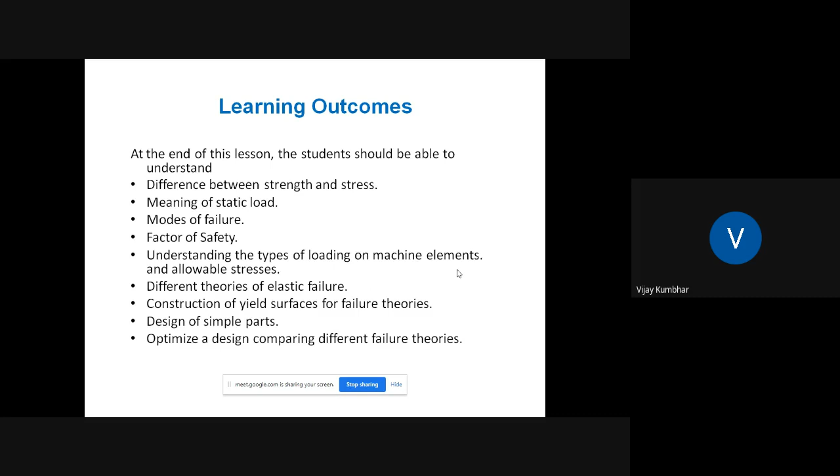There will be specific procedures for general design, component design, and machine design, which you might have learned in earlier classes. So I'm going to brush up on the things. You might be aware about stress and strain. What is strength? Strength is a property of the material or a mechanical element.

The strength of an element depends on the choice and processing of the material. Basically, strength is nothing but the resistance to deformation. Stress is a state of property at a specific point within a body, which is a function of load, geometry, temperature, and manufacturing processes. The book definition of stress is the internal resistive force per unit area.

You might have learned that stress and pressure have the same units, but stress is induced inside the body, whereas pressure is applied on the body. Due to the application of pressure, there will be stress induced. Stress is induced, and pressure can be applied.

As you know, any machine element is intended to do a specific function during its service life. So as per the application, we have to design that particular component, taking into account various parameters associated with it while designing.

In some cases, the stresses acting on an element are very simple and you can calculate them easily, determining whatever stress develops at a particular location of the component by considering the cross-sectional area of that element.

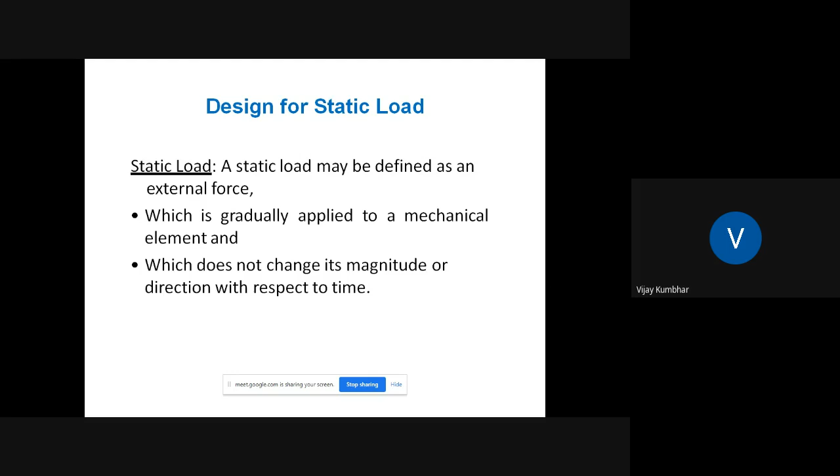Another characteristic of this load is that it is gradually applied to the mechanical element. Whatever load is applied on a component, it will remain as it is, and we can check its magnitude—it will be the same as initially applied.

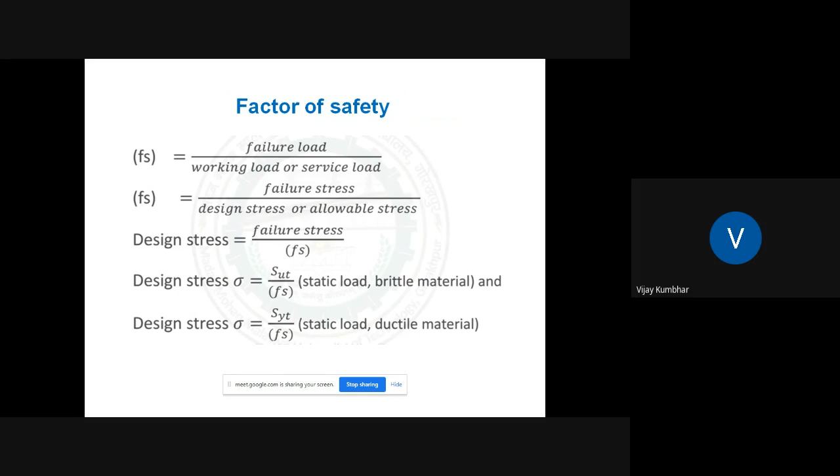Factor of safety depends on various parameters. These parameters are based on the type of load the material is subjected to—point load, UDL, UVL, etc.—on which the chances of failure can be defined, and accordingly the factor of safety can be selected.

After that, the mechanical property of that particular material. After that, the degree of reliability of the material, or the reliability requirement of that material.

After that, calculation of these stresses—because as I told earlier, if a component is subjected to a simple stress, suppose a shaft is subjected to tensile load, then we can easily calculate the exact stress developed at any location of that component. But when the component is subjected to different types of stresses, it is very difficult to calculate the exact stress condition.

Sometimes the component has a very intricate shape, so we are not able to calculate the exact area which is subjected to that particular stress. In that condition, we are unable to calculate the exact stress developed in that component, so we have to provide a higher factor of safety.

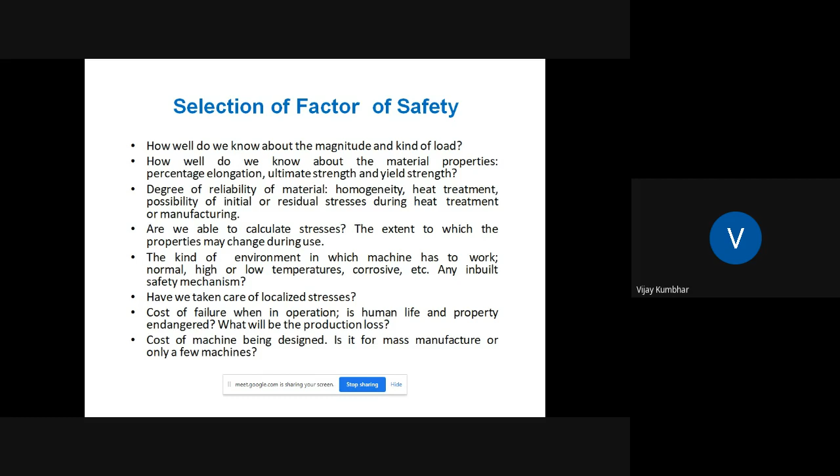So this is the most important part of the selection of factor of safety, and this factor of safety can be selected on the basis of certain guidelines or published literature. You can see these various parameters, and if the parameter is known or unknown, or one parameter is known or unknown, from there we can select that particular factor of safety.

You can see here, for factor of safety for ductile material, in the range of whatever parameters we know, we are going to select that particular factor of safety. In this particular area some parameters are unknown to us, so we are going to select a higher factor of safety for these conditions.

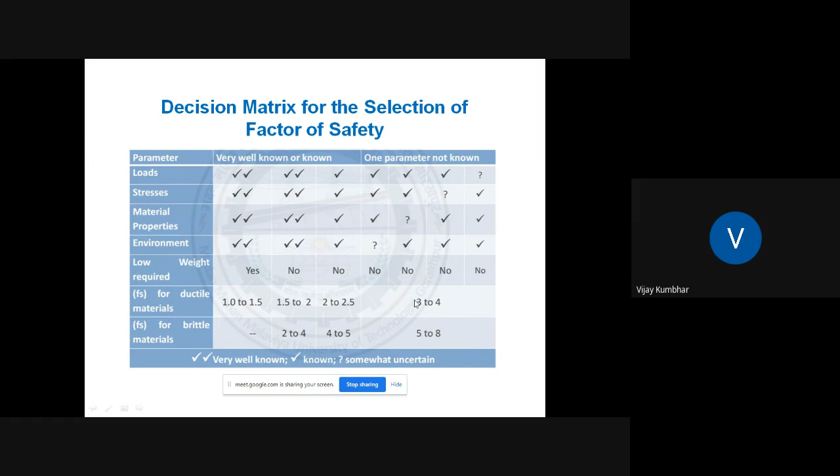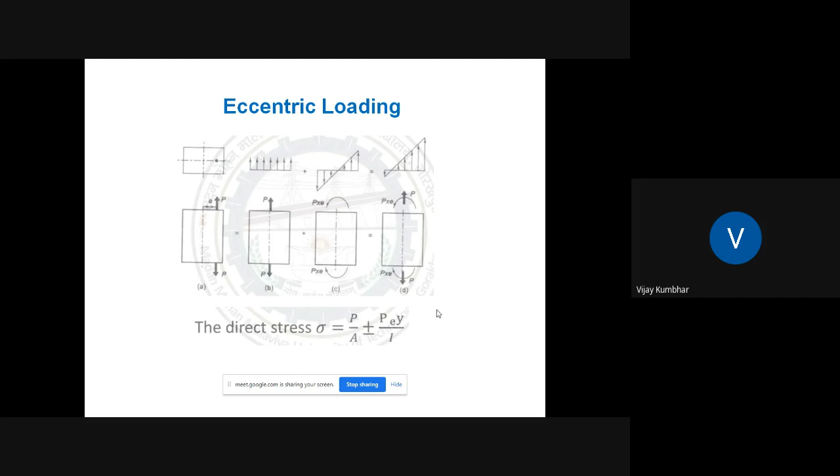Then this is eccentric loading. When a certain member is subjected to eccentric loading, the direct stress can be calculated as P divided by A, plus or minus P times E times Y divided by I.

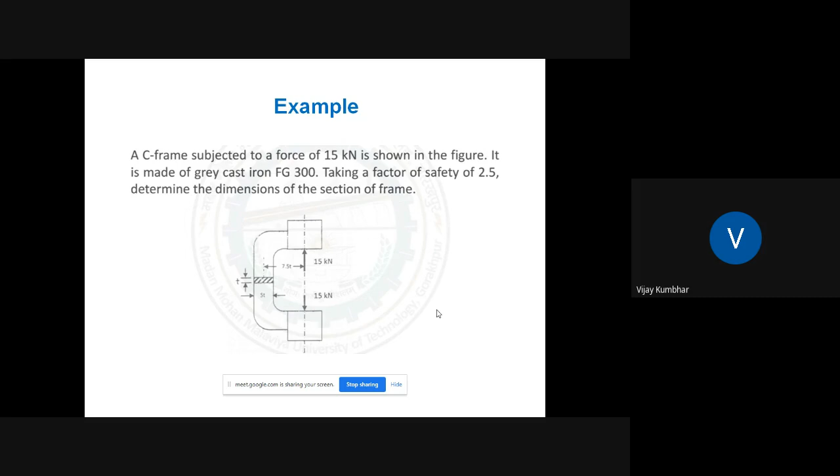So let's see one example of this eccentric loading: a C-frame subjected to a force of 15 kilonewton as shown in the figure, made of grey cast iron FG 300, taking factor of safety as 2.5, determine the dimensions of the section of the frame. So this is the given condition: X equals 3, factor of safety is 2.5, load given is 15 kilonewton, and thickness T.

So first you have to calculate the allowable stress, for this cast iron. We calculate the allowable stress as 300 divided by 2.5, which gives 120 Newton per mm square. So whatever stress is actually calculated must be within the limit, or less than 120. From this we can calculate the direct stress using the formula P divided by A: 15,000 divided by 5T square.

So it will be 3,000 divided by T square. Maximum stress developed due to this moment can be calculated as M divided by Z. So from this equation, by simplification, we get the value for T equal to 15.5 mm.

Such types of simple problems you have to solve during this examination.

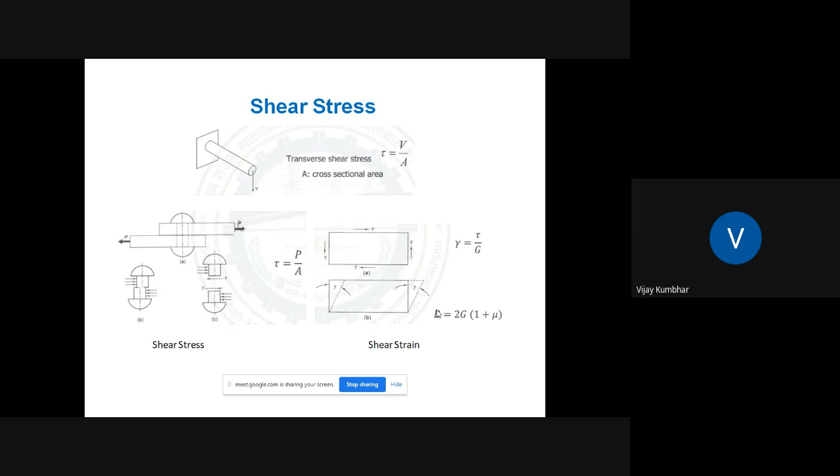So in case of this design, tau is equal to P divided by A. Then sigma B is equal to MBY divided by I, and tau is equal to MTR divided by J. These are the elementary equations of the design.

All the equations related to machine design can be derived from these three equations. So these three equations are called the fundamental equations of the design.

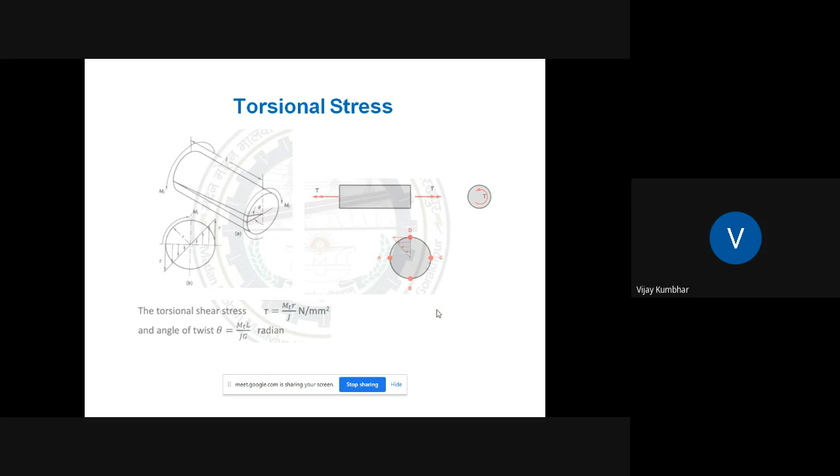That is, one acting in x direction, another in x and y direction, and x, y, z direction. Then you might have calculated various stress conditions. The planes on which the principal stresses act are called the principal planes, and it may be observed that shear stress is zero on this plane.

This is the most important thing - you may be asked about shear stress at the principal plane. It must be zero, you must remember. So shear stress is zero on this particular plane.

So how to draw this Mohr circle diagram? Sigma 1 is equal to sigma x plus sigma y divided by 2, plus or minus the square root of sigma x minus sigma y divided by 2, bracket square, plus tau xy bracket square. This is the biaxial stress condition.

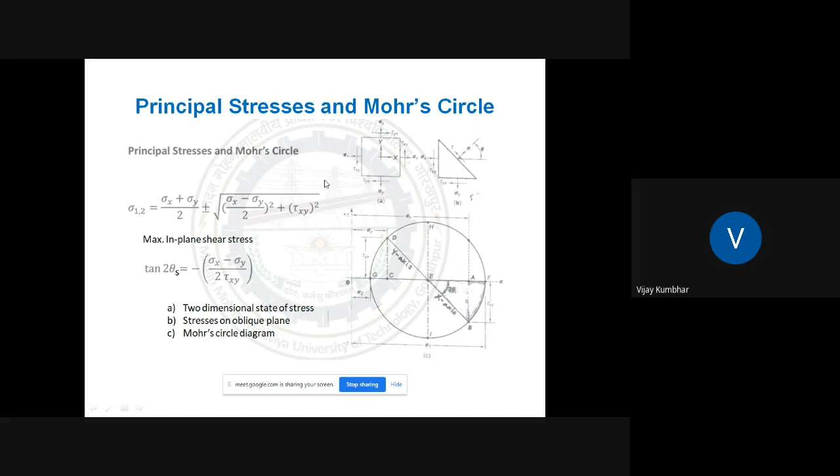So from this Mohr circle diagram, you can easily find out sigma 1 and sigma 2, as well as tau xy.

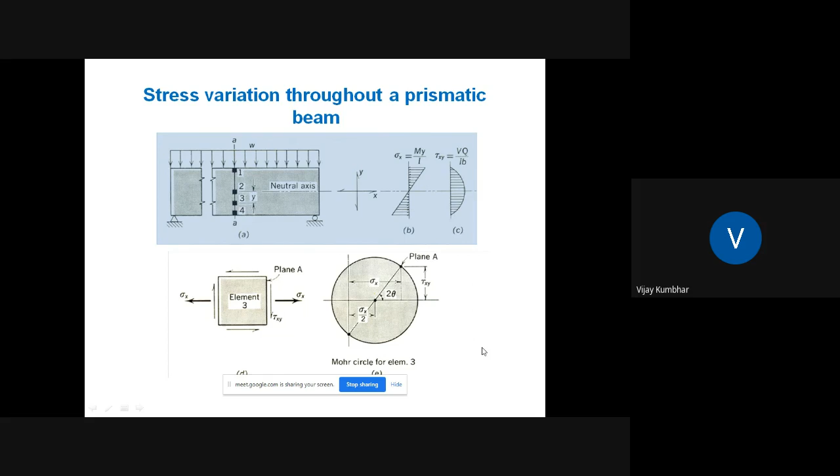So from this equation, from this given condition, you can calculate the Mohr circle as shown in the figure. So we will get the value of tau xy from this particular diagram.

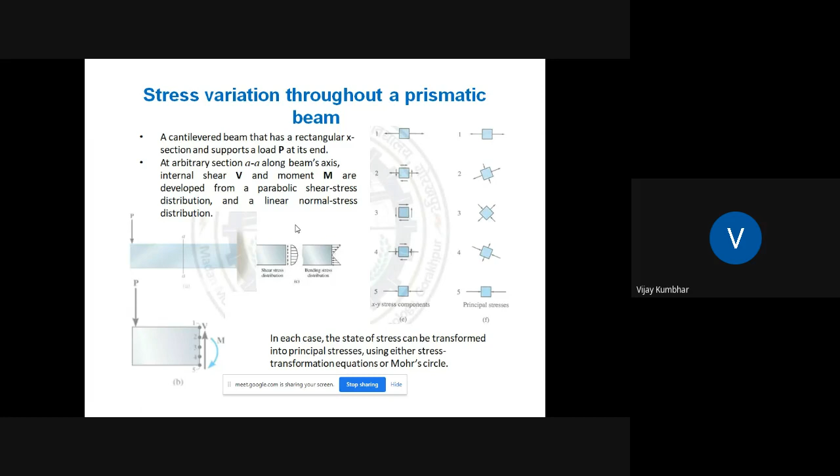This is what the stress variation throughout the prismatic beam, how it may be subjected to distributed stress, how this particular stress is being distributed - shear stress distribution and bending stress distribution might be calculated in case of these bending stresses and shear stresses.

Next is theories of failure. In theories of failure, most machine elements are subjected to several types of force simultaneously. So in order to design such a component, it would be ideal to load a few test pieces to similar forces simultaneously and determine failure forces and design accordingly. But practically, such an approach would be very expensive and time consuming.

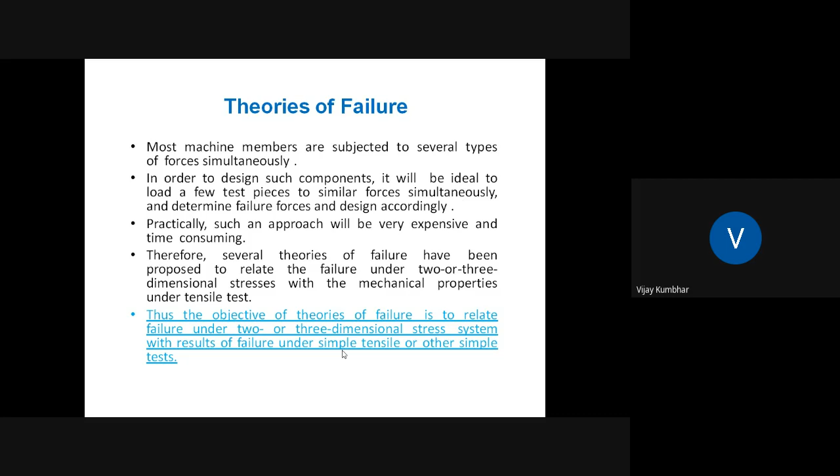Therefore, several theories of failure have been proposed to relate the failure under two or three-dimensional stresses with the mechanical property under tensile test. So we can't predict the failure of any component when it is subjected to several types of forces simultaneously. In that condition, we predict the failure by considering similar conditions using tensile tests.

So there are different types of theories: maximum principal stress theory or normal stress theory, maximum shear stress theory, maximum strain energy theory, maximum principal strain theory, and distortion energy theory.

You might be asked in the GATE exam: maximum principal theory is also known as Rankine theory. The maximum shear stress theory is the Coulomb or Tresca theory. The maximum strain energy theory is Beltrami's theory, maximum principal strain theory is Saint-Venant's theory, and distortion energy theory is Von Mises theory. You must know these alternate names for the theories of failure - it will be very beneficial.

In case of the maximum principal stress theory, according to this theory, failure of any component occurs whenever the largest principal stress in the component exceeds the strength of that material in tensile or compressive stress. Material will fail when the largest principal stress in the component exceeds the strength of the material in tensile or compression.

So sigma 1 is equal to SYT. If yielding is the criteria of failure, then failure will occur whenever sigma 1 is equal to SYT or sigma 3 is equal to SYC. In case of ductile material, SYT is equal to SYC is equal to SY - at this condition the component will fail. But for brittle materials, failure will occur whenever sigma 1 is equal to SUT or sigma 3 is equal to SUC.

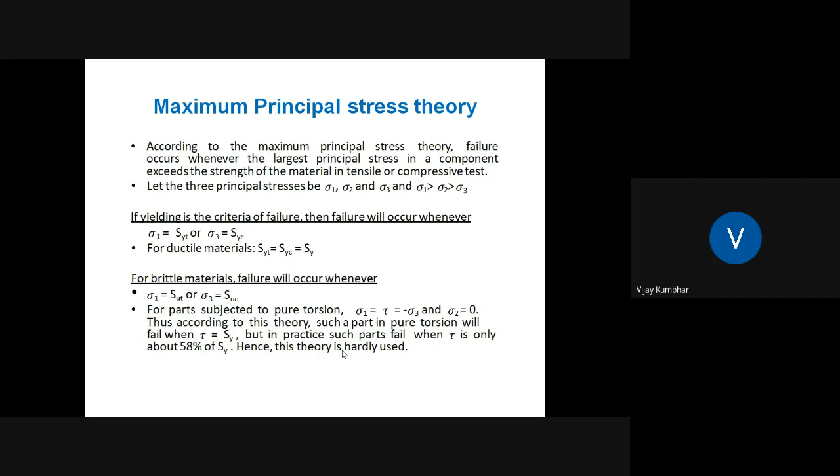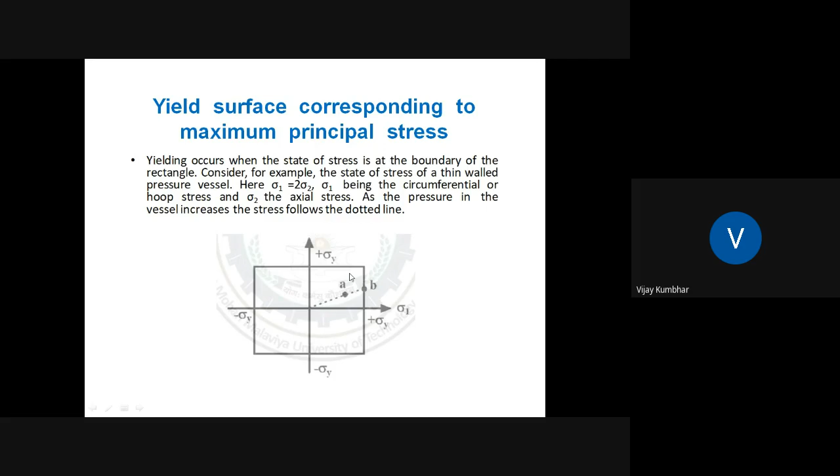Second is the maximum shear stress theory. According to this theory, failure occurs whenever the maximum shear stress in the component exceeds the shear strength of that material at the point of yielding. This theory is based on yield stress and hence it is applied to ductile material, since it is subjected to yielding.

You might remember that yield point because of the stress behavior of ductile material - it's based on yielding, so it applies only to ductile material. The shear strength of the material is half of the yield strength in tension: SSY is equal to 0.5 SYT. You might use this relation many times to solve various examples and problems related to shear stress.

If you consider three principal stresses sigma 1, sigma 2, sigma 3, with sigma 1 greater than sigma 3, the maximum shear stress acts on three mutually perpendicular planes. Picture a cube subjected to a triaxial stress condition: tau 12 equals sigma 1 minus sigma 2 divided by 2, tau 23 equals sigma 2 minus sigma 3 divided by 2, and tau 31 equals sigma 3 minus sigma 1 divided by 2. Tau max is equated to the largest of these three: tau max equals SSY equals SYT divided by 2, equals sigma 1 minus sigma 2 divided by 2, and so on - this gives the maximum shear stress.

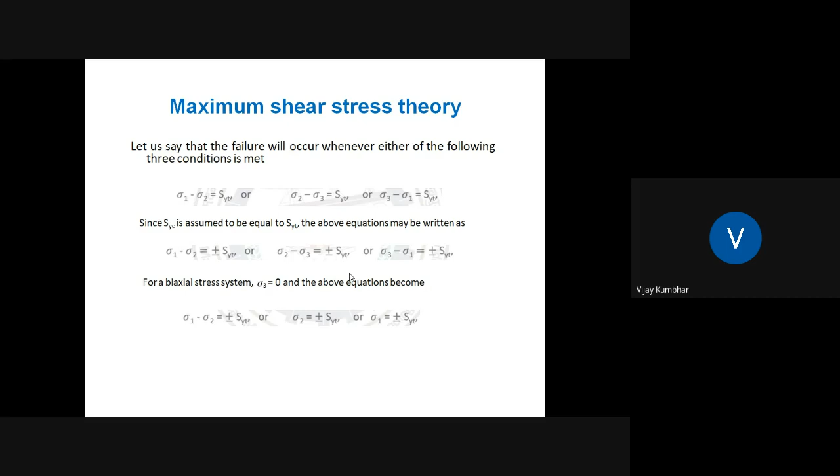This is the yield surface corresponding to maximum shear stress, and you can imagine its shape in the design area.

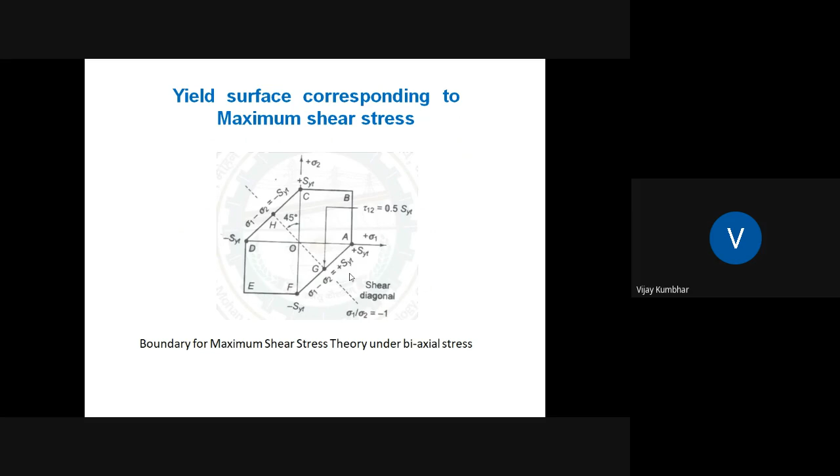Let's see an example: a mild steel shaft of 4 cm diameter is subjected to a bending moment of 1,50,000 Newton centimeters and torque T, with the yield point of the steel in tension given as 20,000 Newton per centimeter square. We need to find the maximum value of torque without causing yielding of the shaft according to maximum principal stress theory and maximum shear stress theory.

The data given: diameter D is equal to 4 centimeters, that is 40 mm. Bending moment is 1,50,000 Newton centimeter, that is 1.5 into 10 raised to 6 Newton millimeter. And Sy is equal to 20,000 Newton per centimeter square, that is 200 megapascal. We need to calculate the maximum value of torque.

We need to calculate the maximum value of the torque without causing yielding of the shaft by using the maximum principal stress theory and maximum shear stress theory. While analyzing, we calculate this modulus Z, which can be calculated as pi d cube by 32. By putting these values in the equation, we get the result.

Z is 6283 mm cube. We know ZP is equal to 2 into Z, which gives 12,566 mm cube. Sigma x is equal to bending moment divided by modulus Z, that is 1.5 into 10 raised to 6 divided by 6283, giving 238.7 Newton per mm square. Tau is equal to T divided by ZP, giving T into 79.58 into 10 raised to minus 6.

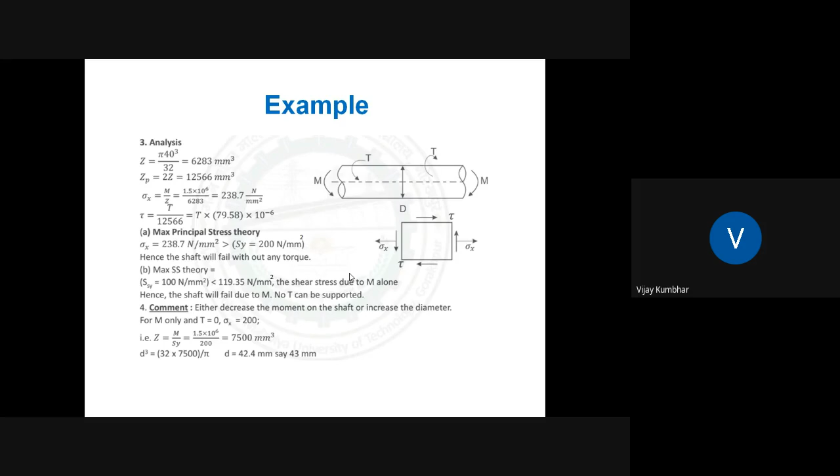So either decrease the bending moment on the shaft or increase the diameter. Taking T equal to 0, sigma equal to 200, we can calculate Z equal to M divided by Sy, giving 7,500 mm cube. From this equation, we calculate the diameter value as 43 mm. So for 43 mm diameter, the design of this shaft will be safe according to both maximum principal stress theory and maximum shear stress theory.

Now this brings us to the maximum strain energy theory.

According to this theory, failure of the mechanical component subjected to biaxial or triaxial stress condition occurs when the strain energy per unit volume exceeds the strain energy per unit volume of the specimen under tensile stress. There is a big relationship, or derivation, for this particular maximum strain energy theory. You might be studying machine design or design of machine elements, and that derivation, how to calculate this particular safe zone for this maximum strain energy theory by considering triaxial stress condition, you might be studying in that particular subject.

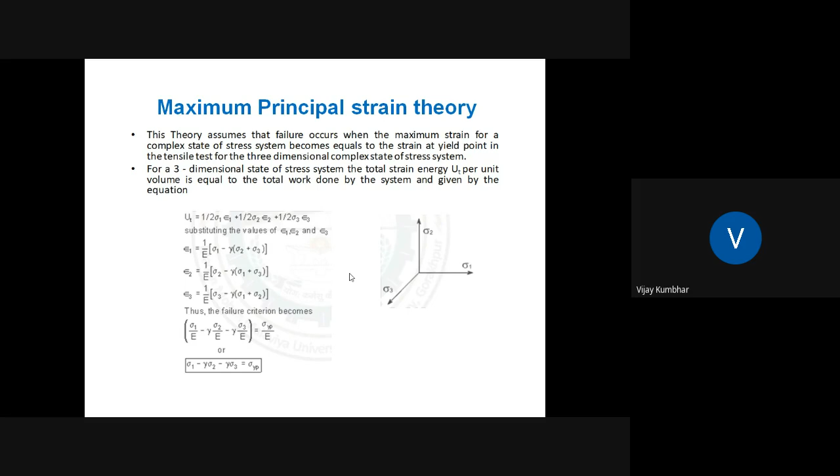Then the maximum principal strain theory. This theory assumes that failure occurs when the maximum strain for the complex state of stress system becomes equal to the strain at the yield point in tensile test for the three-dimensional complex state of stress system. So sigma 1, sigma 2, sigma 3, and the failure criteria becomes sigma 1 divided by E minus nu sigma 2 divided by E minus nu sigma 3 divided by E equal to sigma yp divided by E.

Then as far as distortion is concerned, this theory states that failure of a mechanical component subjected to biaxial or triaxial stress condition occurs when the strain energy of distortion per unit volume at any point of the component becomes equal to the strain energy of distortion per unit volume in the standard specimen of the tension test when yielding starts. You might have derived this particular condition while studying this subject.

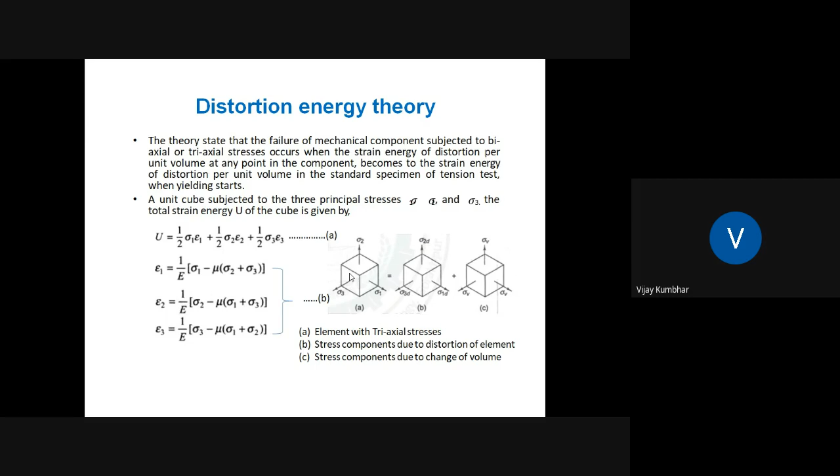This is design under static loading condition. Now the second one is design against fluctuating load, or dynamic load. What is dynamic load? Dynamic load is nothing but when the magnitude and direction of a particular load changes with respect to time.

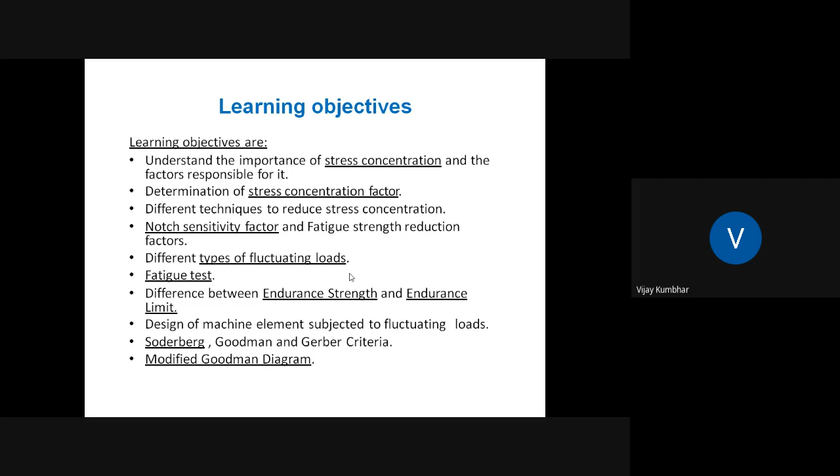So we are going to see the stress concentration factor, what is notch sensitivity, types of fluctuating load, fatigue test, then endurance limit, and related different types of definitions - what is fatigue, endurance limit stress, and all these things.

As I told you, these are the fundamental equations: sigma T equals P by A, sigma B equals M times y by I, and tau equals MT times R divided by J. These are the fundamental or elementary equations of this design process. When we say these are correct equations, there are certain assumptions - there must be homogeneous material of that particular component, and there should not be discontinuity in that element while designing.

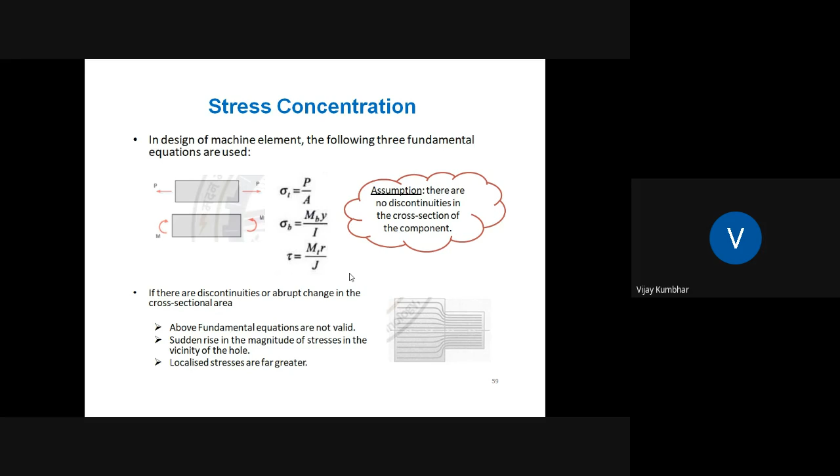But sometimes, as per application, there will be abruptness in the cross section of that particular material, or an inhomogeneous, heterogeneous composition of the component. So there will be stress concentration at that particular location. If there are discontinuous or abrupt changes in the cross-sectional area, these fundamental equations are not valid - there's a sudden rise in the magnitude of stresses in the vicinity of a hole, and localized stresses are far greater. In that condition these elementary equations don't work properly, so we have to provide some certain provisions to reduce this localized stress concentration on any material or component.

If you look at discontinuities in a component - first, there is the location of a bearing, an abrupt change in cross section, so it may be subject to stress concentration. In the second element, there will be a key slot, and due to this key slot there will be chances of stress concentration. Then there are threads at certain locations, which also generate these stresses. Sometimes there are fillet grooves, certain lines, and shoulders - these are all subjected to generating discontinuity and stress concentration at that particular location.

So we have to consider this stress concentration factor while designing this component. The stress concentration factor means what? It can be defined as a localization of high stresses due to irregularities present in the component and abrupt changes in the cross section.

So irregularity means what? Whatever the composition may be, there will be chances of irregularity or impurities in that particular element. So it will generate localization of higher stresses at that particular location. And another cause is abrupt changes in the cross section.

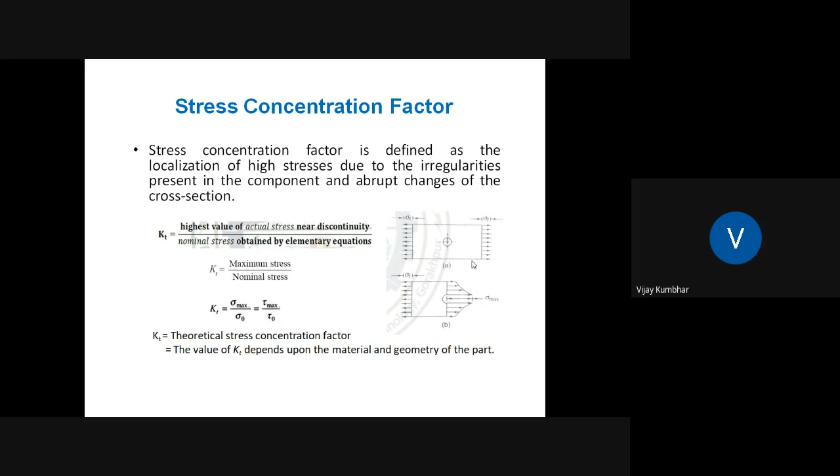So Kt is the stress concentration factor, theoretical stress concentration factor, and it can be calculated as the highest value of the actual stress near discontinuity to the nominal stress obtained by the elementary equations. So Kt is equal to maximum stress divided by nominal stress, that is sigma max divided by sigma O, or tau max divided by tau O. From this equation we can calculate the stress concentration factor.

This stress concentration factor can be determined by two methods. One is theoretical methods, theory of elasticity, and FEA, finite element analysis. Second is experimental methods: strain gauge method, photoelasticity techniques, brittle coating techniques, and grid method. From this we can calculate this particular value of stress concentration factor.

So causes of stress concentration are variation in the property of the material, load applications, abrupt changes in the cross section, discontinuity in the component, and machining scratches. If you see all these causes, there will be changes in the particular cross section, and it will be subjected to stress concentration at that particular condition.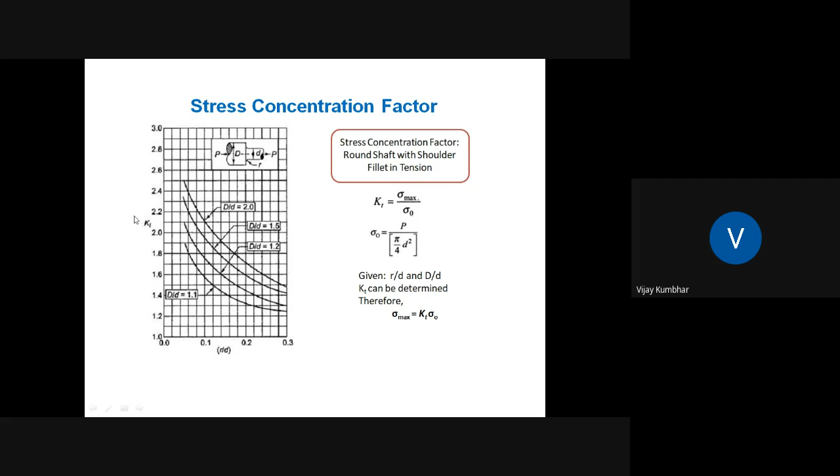So whatever charts are shown, these are based on photoelastic studies of this particular model.

Under static load, ductile materials are not affected by stress concentration. When the stress in the vicinity of the discontinuity reaches the yield point, there is plastic deformation resulting in a redistribution of the stresses. Therefore Kt is not used for ductile material under static load. This is most important, that the theoretical stress concentration factor is not used in case of ductile material.

When ductile material is subjected to static loading, the effect is more severe in case of brittle material due to inability of plastic deformation. There is no plastic deformation in brittle material, and as told earlier, in ductile material there are indications of failure, like yielding. This material is subjected to yield, meaning there is a change in the cross-sectional area, so we can easily predict the chances of failure of this particular material.

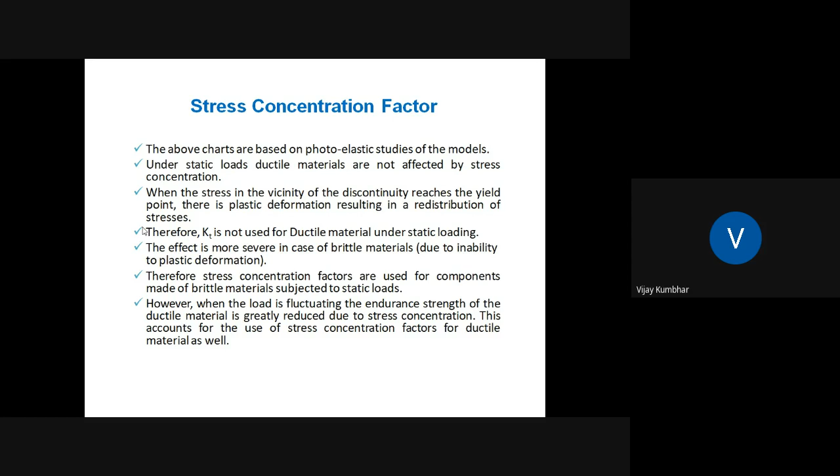This accounts for the use of stress concentration factor for the ductile material as well. Then theory of elasticity.

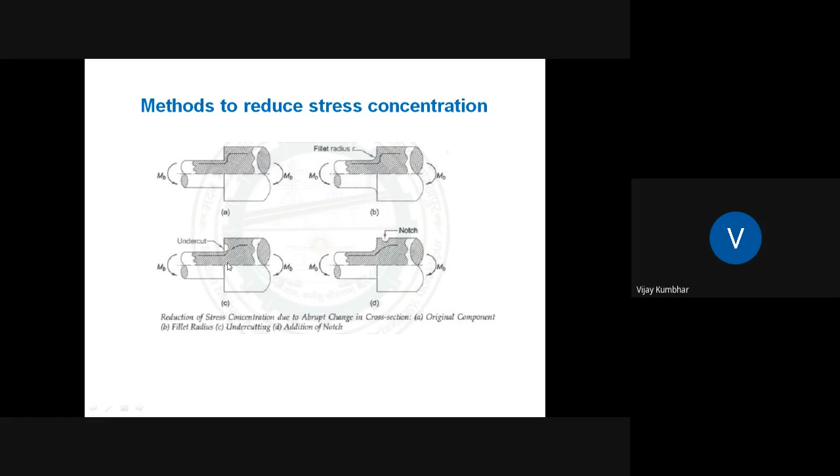Then methods for reduction of stress concentration. You can see there is an abrupt change, so we have to provide fillets. You can observe the stress lines and the flow. Then providing notches will be at this particular location where there are fillet areas. You can see additional notches will be there. Then at this particular condition, fillet radius - this is what is called the undercut, and this is the notch. These are the methods utilized to reduce the stress concentration.

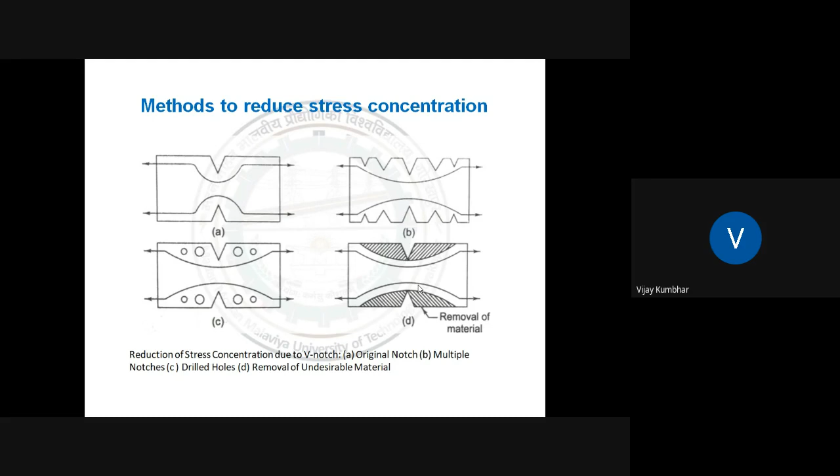Again, in this case, this is the original component having the V notch, and you can reduce this by providing multiple notches for this particular element so as to reduce the stress concentration. Again, you can provide these types of holes to reduce this particular stress condition. Otherwise, you can remove undesirable material from this component to reduce this stress concentration effect.

So you can see the stress concentration because of this. Also, if there is a hole, you can take additional holes having a smaller diameter compared to the intended hole, so there will be reduction in stress. Then in case of a shaft, if a keyway is provided in this particular shaft, there will be the provision of radius. And we can make additional holes so as to reduce the stress concentration from this particular shaft.

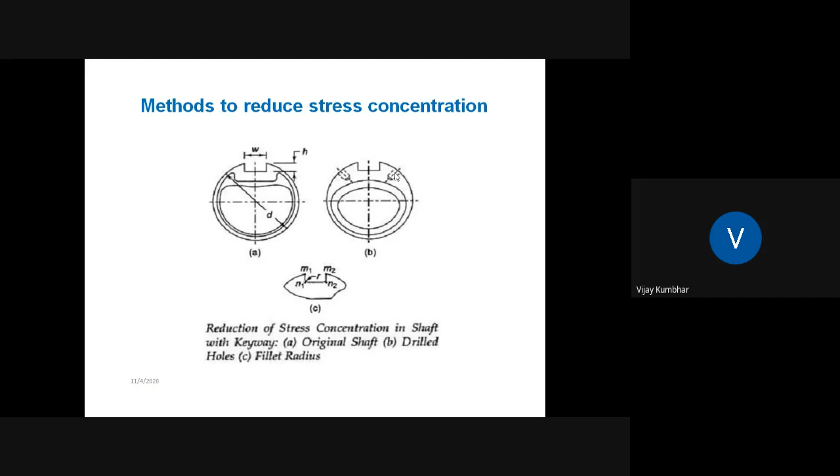Then there are various methods for reduction of stress concentration. You can see undercutting, round fillet, undercutting, then grooves are provided in this particular condition. Various techniques are utilized for whatever components are subject to stress concentration or certain types of fluctuating stresses. You have to provide some techniques to reduce the stress concentration and enhance the life of that component. So various techniques have been utilized to reduce stress concentration.

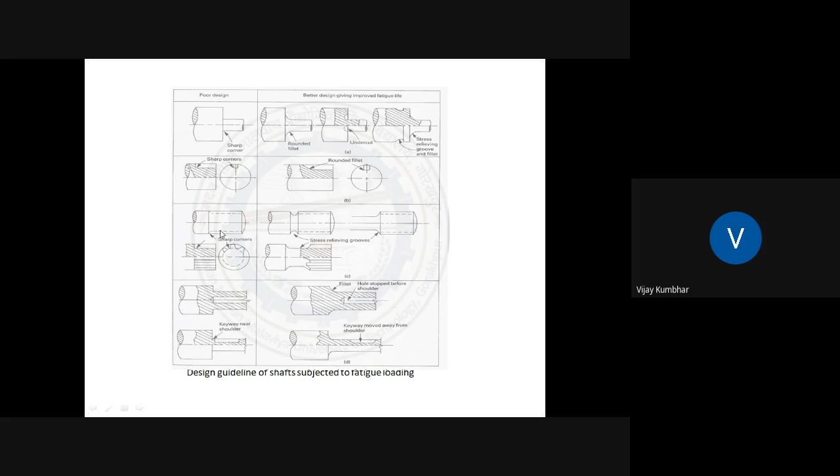Avoid sharp corners by putting fillets, etc. Then you can see one example: the maximum stress developed in a stepped shaft subject to a twisting moment of 100 Newton as shown in the figure. What will be the maximum stress developed if a bending moment of 150 Newton is applied?

So this is the given condition: capital D and small d, and R is given - this is the fillet radius, the value of this fillet radius. Small d is equal to 30 mm and capital D is equal to 40 mm, and this shaft is subject to twisting moment. So from this you can take the value of kt.

From this, given r by d is equal to 0.2 and capital D divided by small d, you can calculate: small r divided by small d is equal to 0.2, and capital D divided by small d is equal to 1.33, giving kt. So from this equation, with 0.2, the value of kt is equal to 1.2. By putting this value in the equation, we get tau max is equal to 23.20.

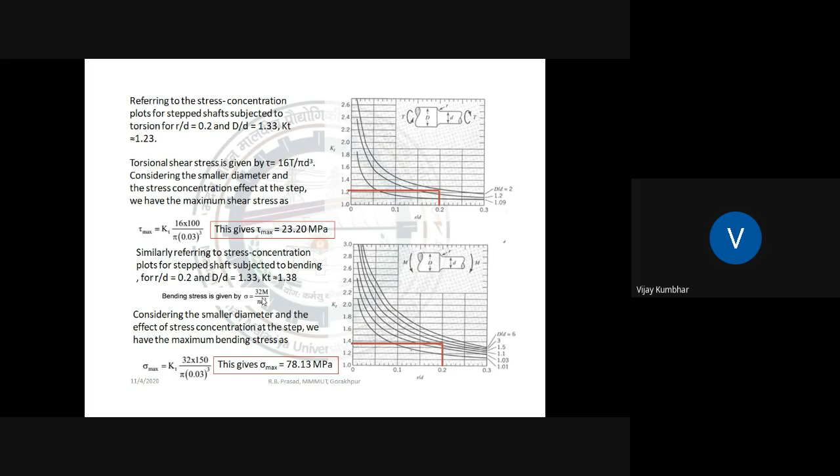Again, this is subjected to torsional moment. Again this shaft is subjected to bending moment. Again value of small r divided by small d is equal to 0.2. Again you can take the value of kt, the stress concentration factor, which is equal to 1.4. By putting this value in the equation for bending stress developed in this particular shaft loading condition, we get sigma max is 78.13 megapascal.

In the design for fluctuating loads, a large number of mechanical components are subjected to loads that are not static but fluctuating or cyclic. Even a static load causes cyclic stress in a rotating shaft. Fluctuating stresses are called cyclic because they are repetitive when plotted against time. The shape of the repetitive stress-time curve is not important, but the mean and amplitude of stresses are.

Ultimate and yield strength were used in the design for static load. In the case of fluctuating loads, in addition to ultimate and yield strength, we need the strength of the material under fluctuating loads, called the fatigue strength of the material, which must be lower than the ultimate or yield strength.

The magnitude of stress causing fatigue failure decreases as the number of stress cycles increases. The phenomenon of decreased resistance of the material to fluctuating stress is the main characteristic of fatigue failure. Fatigue failure means a time-delayed fracture under cyclic loading.

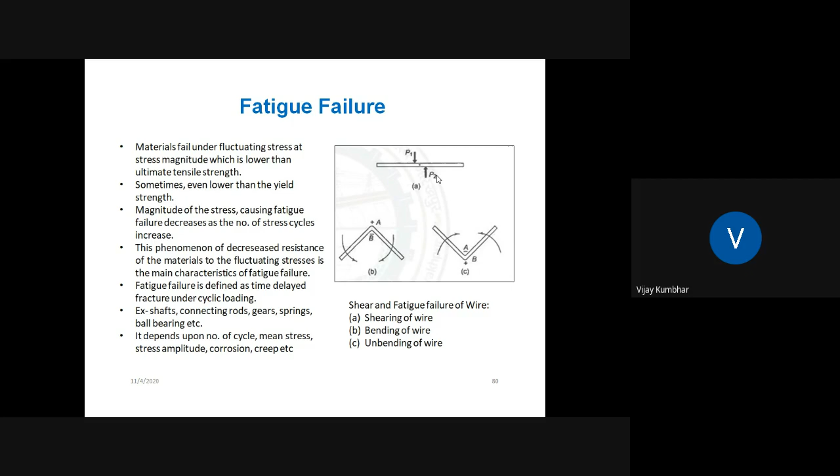This occurs in components like shafts, connecting rods, gears, springs, ball bearings, etc. It depends on the number of cycles, mean stress, stress amplitude, corrosion, creep, etc. Under these conditions the material will fail.

So there is static load failure and fatigue failure. Failure under static load can be illustrated by the simple tension test case. Load is gradually applied and we study the stress curve, and you may be well aware of the fracture point. But in the case of fluctuating load, fatigue failure begins with a crack at some point in the material.

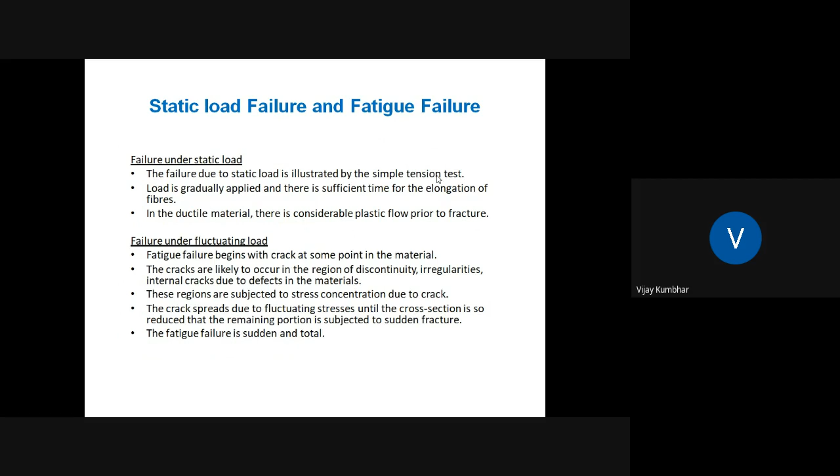Cracks are likely to occur in regions of discontinuity, irregularity, internal cracks, or defects in the material. These regions are subjected to stress concentration due to the crack. The crack spreads due to fluctuating stresses until the cross section is reduced so that the remaining portion is subjected to sudden fracture. So fatigue failure is sudden and total failure.

In many applications, you might be aware that about 80% of failures of mechanical elements are due to fatigue failure resulting from fluctuating stresses.

So you can see this stress-time relationship. A, we have fluctuating stress with high frequency. B is non-sinusoidal fluctuating stress. C is also non-sinusoidal fluctuating stress. D is the sinusoidal fluctuating stress.

Sigma A is the stress amplitude. Sigma min is the minimum stress. Sigma M is the mean stress. Sigma max is the maximum stress, plotted against time on the x-axis.

In the case of sinusoidal fluctuating stress, we have values of sigma max and sigma mean. In the case of repeated stress, the minimum stress sigma min is equal to 0. In the case of completely reversed stress, this is most important: the mean stress sigma mean is equal to 0.

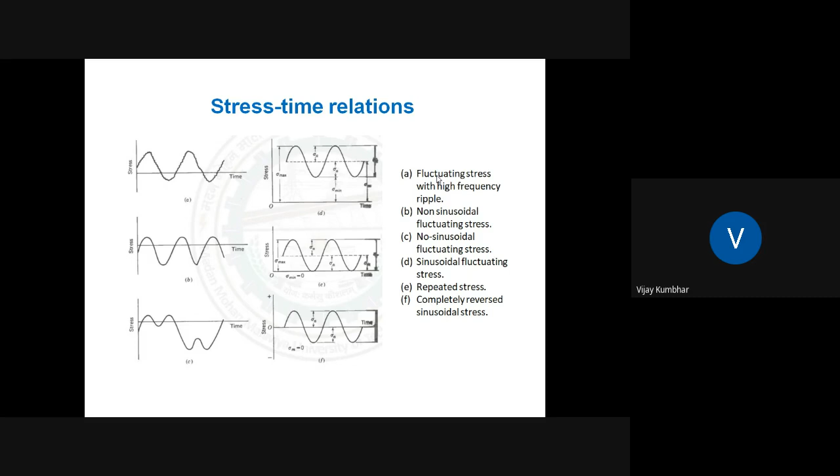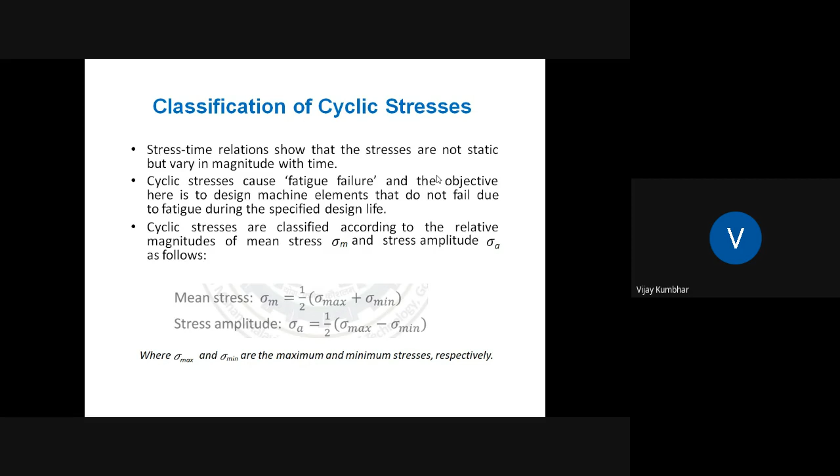Then how do we calculate mean stress and stress amplitude? Mean stress is calculated as sigma m equals one half times (sigma max plus sigma min). Stress amplitude is calculated as sigma A equals one half times (sigma max minus sigma min). From this equation we can easily calculate the mean stress and stress amplitude. These are the cyclic stress conditions.

Sigma A is the stress amplitude. In case of fluctuating stress, sigma max, sigma min, and sigma mean are all non-zero. There will be maximum stress, minimum stress, and mean stress. But in case of repeated or pulsating stress, sigma max or sigma minimum is zero. In case of reverse cycle, the value of mean stress is zero. These are the most important cases.

There may be objective type questions in the GATE exam on these particular conditions.

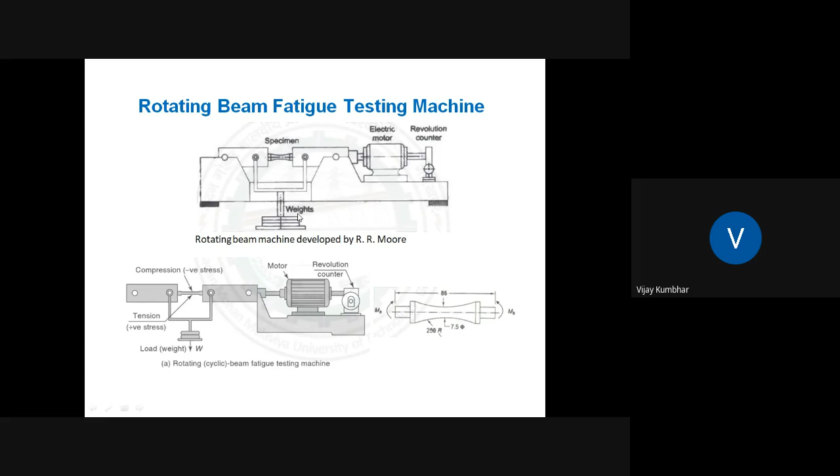One is the fatigue or endurance limit of the material. It can be defined as the maximum amplitude of the completely reversed stress that the standard specimen can sustain for an unlimited number of cycles without fatigue failure. This is called the fatigue limit or endurance limit.

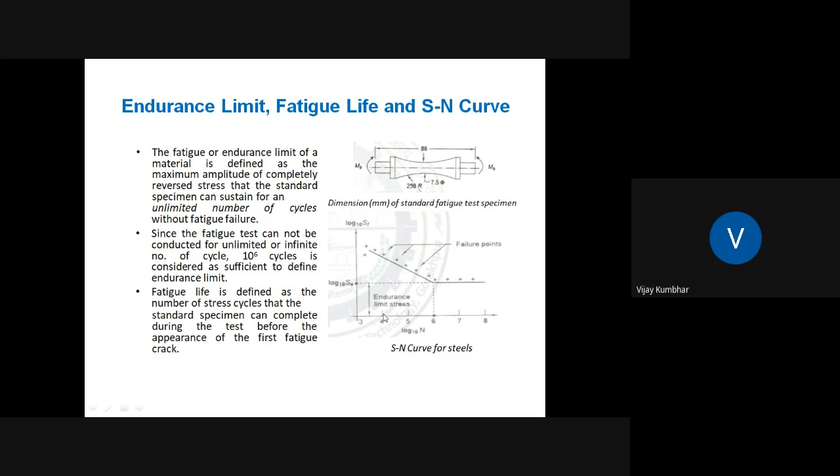You can observe this is the S-N curve for this particular steel material. You can observe the endurance stress, and these are the failure points. These are log graphs.

Again, low cycle fatigue and high cycle fatigue. In case of low cycle fatigue, any fatigue failure less than 1000 cycles is called low cycle fatigue. Any failure more than 1000 cycles is called high cycle fatigue. Failure of studs on truck wheels, setscrews for locating gears on shafts, and missiles are examples of low cycle fatigue. Failure in springs, ball bearings, and gears are examples of high cycle fatigue.

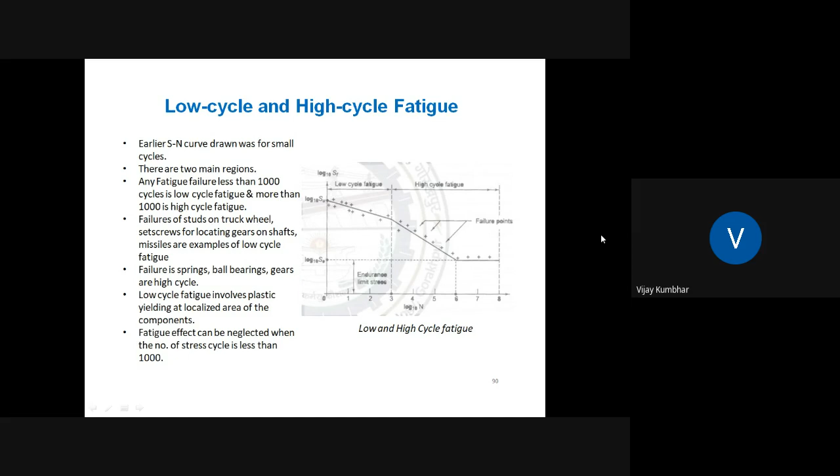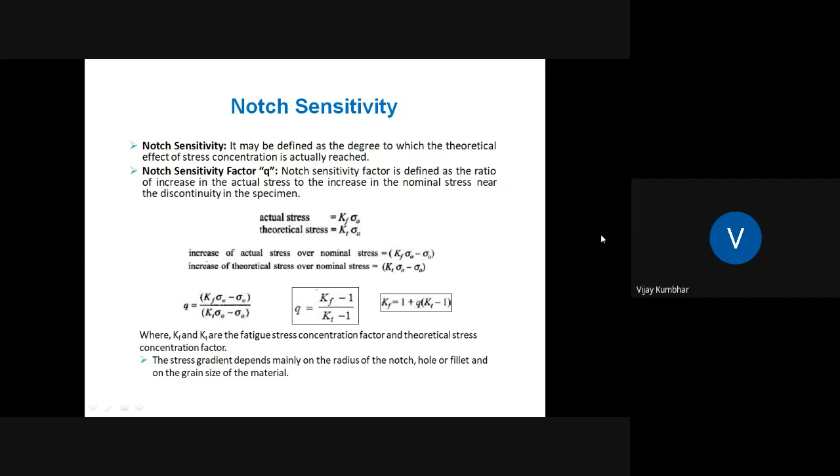Following conclusions can be drawn with the help of KF. We get the equation KF equals 1 plus Q into KT minus 1. When the material has no sensitivity or no notches, Q equals 0, and in that condition KF equals 1. When the material is fully sensitive to notches, Q equals 1, then KF equals KT.

In general, the magnitude of the notch sensitivity factor varies between 0 and 1. This is an important point: notch sensitivity factor Q varies in the range of 0 to 1. In case of doubt, the designer should use Q equal to 1, or KF equal to KT, for a safe design.

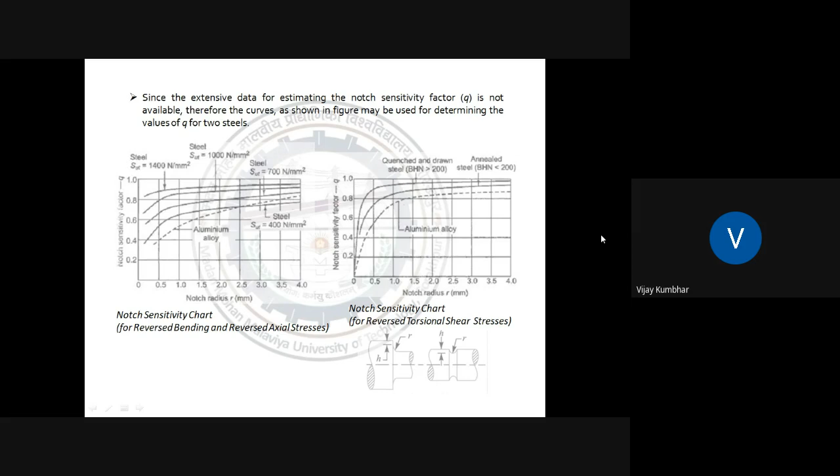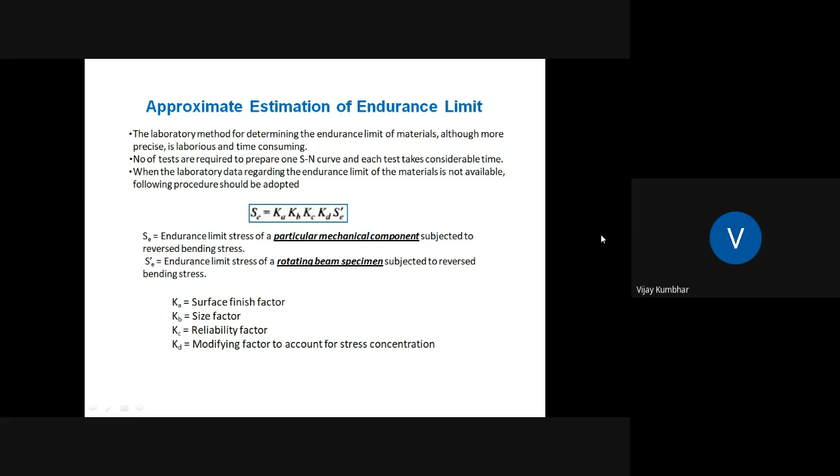Se is the endurance limit stress for a particular mechanical component subjected to reverse bending stresses, and Se dash is the endurance limit stress for the rotating beam specimen subjected to reverse bending stress. Ka is the surface finish factor, Kb is the size factor, Kc is the reliability factor, Kd is the modifying factor to account for stress concentration. These are the most important factors you can take while designing. This is the relation between endurance limit and ultimate tensile stress.

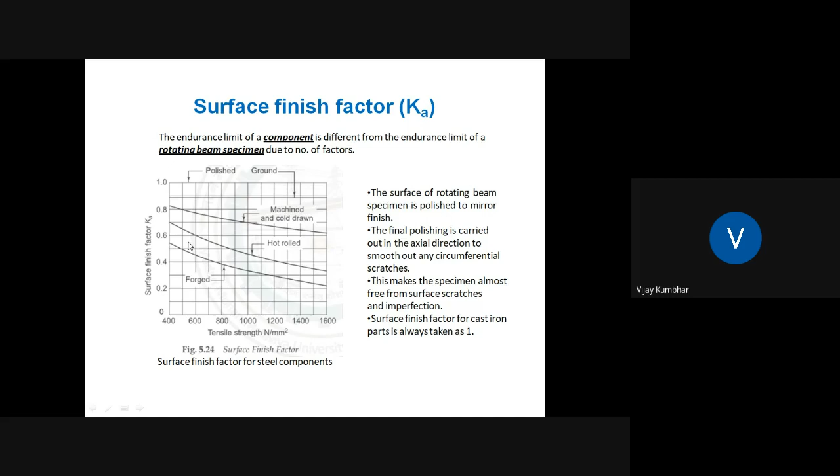For the size factor, the value of Kb can be calculated from the given ratio. If D is less than or equal to 7.5, the size factor Kb is 1, because the specimen used in the rotating beam experiment has a 7.5 mm diameter. If the diameter is in the range of 7.5 to 50, the size factor Kb will be 0.85, and if the diameter is greater than 50, Kb is equal to 0.75. For axial loading condition, it will be 1.

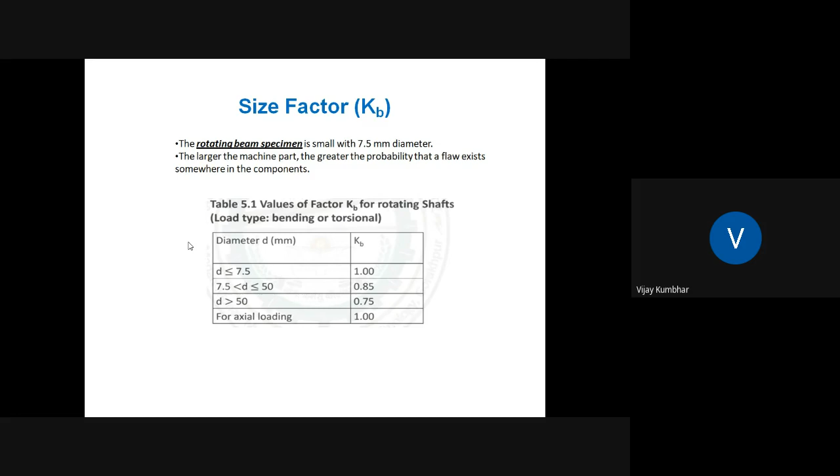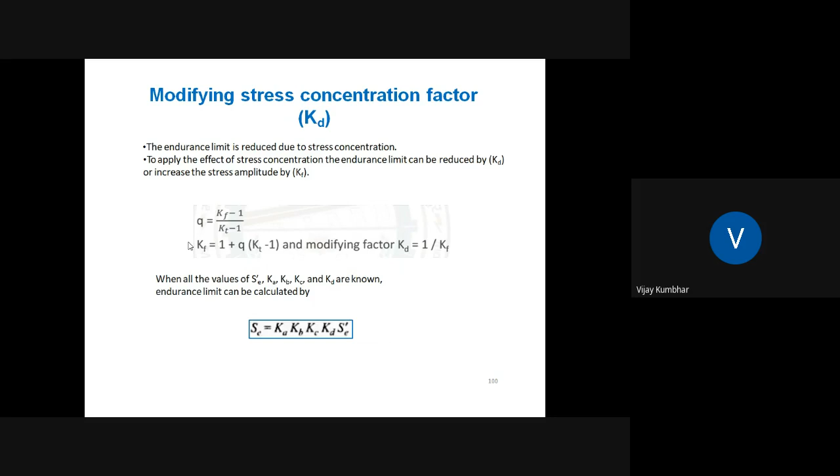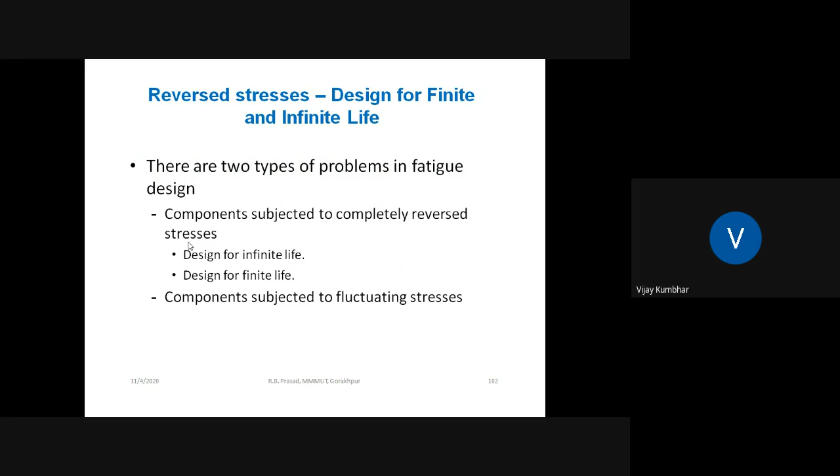Then reversed cycle stress condition, design for finite and infinite life. When components are subjected to completely reversed stress, there are two types of problems in this design: one is for infinite life and another is finite life. In case of infinite life, the criteria of endurance limit stress will be the criteria of failure.

It can be calculated as sigma a equal to Se divided by Fs, and tau a equal to Sse divided by Fs, where sigma a and tau a are the stress amplitudes in that particular component, and Se and Sse are the corrected endurance limits in reverse bending and torsion.

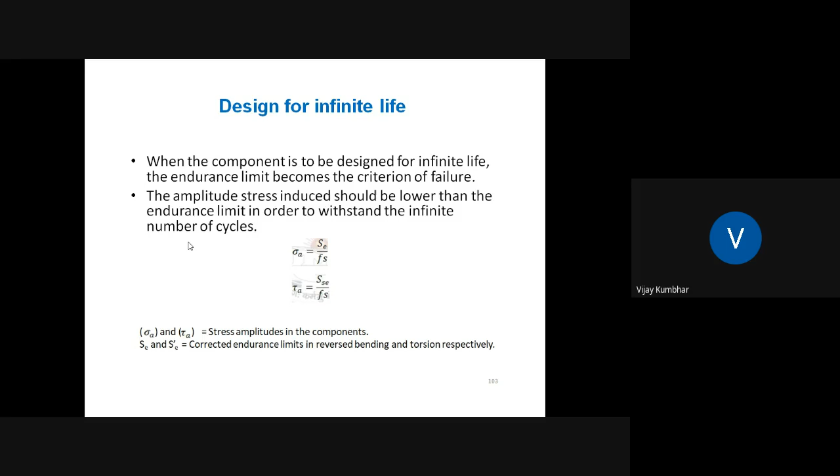Component subjected to completely reverse stresses: sigma 1 for N1 cycles, sigma 2 for N2 cycles, and sigma 3 stays for N3 cycles. In that particular condition, we can use this cumulative damage theory.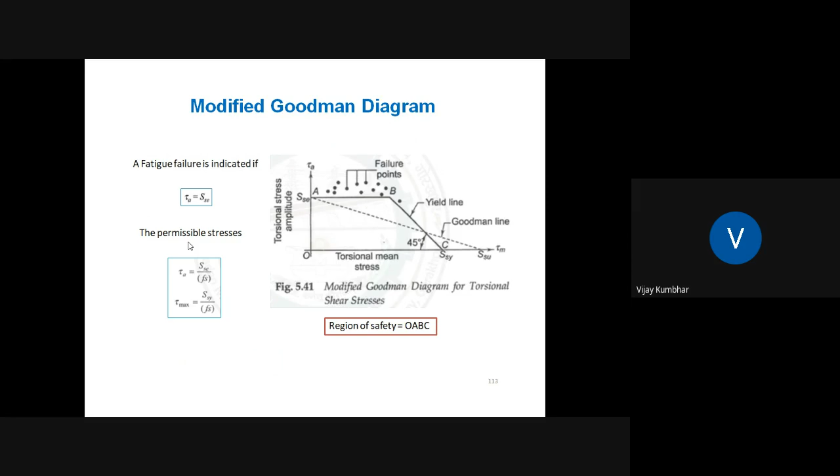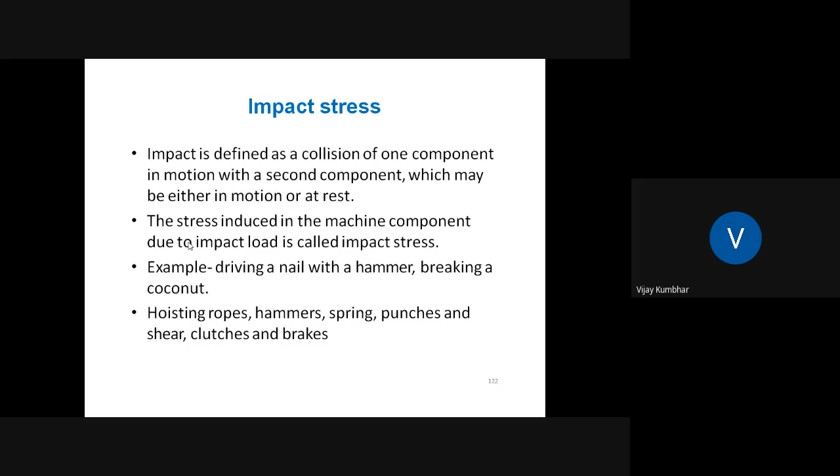Then impact stress. Impact is defined as a collision of one component in motion with a second component, which may be either in motion or at rest.

If you see the summary of loading conditions: static load, axial or bending torsion, gradually applied load, axial stresses, bending stresses, torsion stresses. Then static load with gradually applied load can be solved with the help of principal stresses and theories of failure.

Then there will be fluctuating stresses. In that case, sigma mean is equal to 0, solved by using the SN curve. Then fluctuating load, reverse cyclic, sigma mean is equal to 0, we can solve using the SN curve by finite life.

And fluctuating reverse stress, with different stress levels for different cycles, solved by the cumulative damage theories. That is, for n1 number of cycles there will be sigma 1 stress, for n2 number of cycles there will be sigma 2 stress, and likewise.

Again, in case of fluctuating load subjected to axial, bending, or torsional stress, where sigma mean is not equal to 0, it can be solved with the Goodman and Gerber modified diagram. Where fluctuating and combined stresses are concerned, and sigma is not equal to 0, it can be solved with the help of distortion energy theory and the modified Goodman diagram.

Impact load, suddenly applied, by impact stresses we calculate various stress conditions. So this is the design of machine elements under static loading and fluctuating loading.

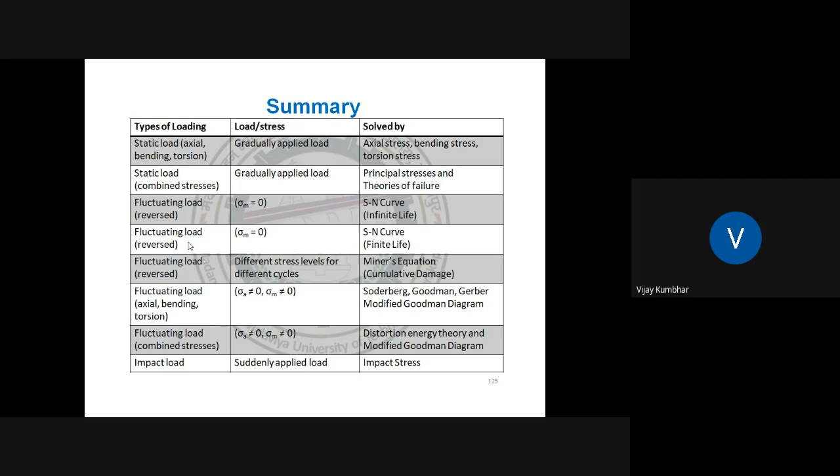So the second part covers the various types of connections: riveted connection, bolted connection, and welded connection. I'm not going to go into too much detail since these are theoretical parts.

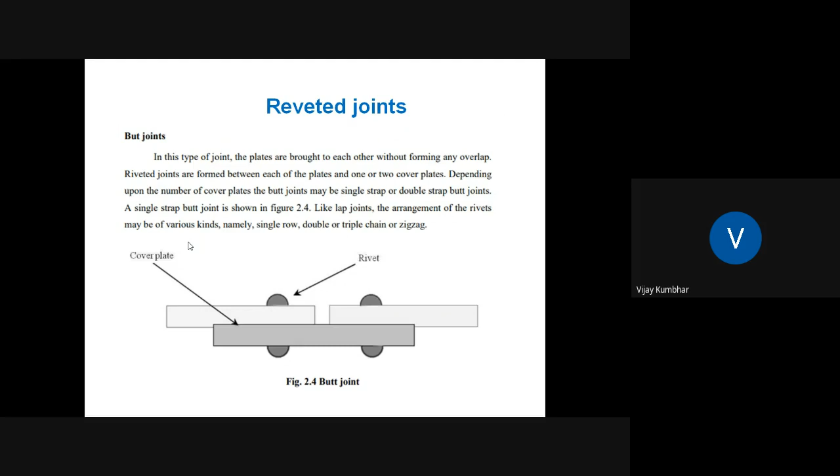Pitch is the distance between the centers of two consecutive rivets in a single row. Back pitch is the shorter distance between two successive rows in a multiple riveted joint. Diagonal pitch is the distance between the centers of rivets in adjacent rows of a zigzag riveted joint. Margin or marginal pitch is the distance between the center of the rivet and the nearest edge of the plate, denoted by M.

There are different types of welded joints. Looking at the strength and indications of a welded joint, in case of this transverse fillet weld, you can see the throat thickness, and the leg or size of this weld can be the reinforcement. This is what DB is, and BD is the throat thickness. AB is the leg length or size of the weld.

The minimum cross section will be BD, determined with the throat thickness. T will be the thickness of the plate and size of the weld. L will be the length of the weld. Sigma is the allowable stress.

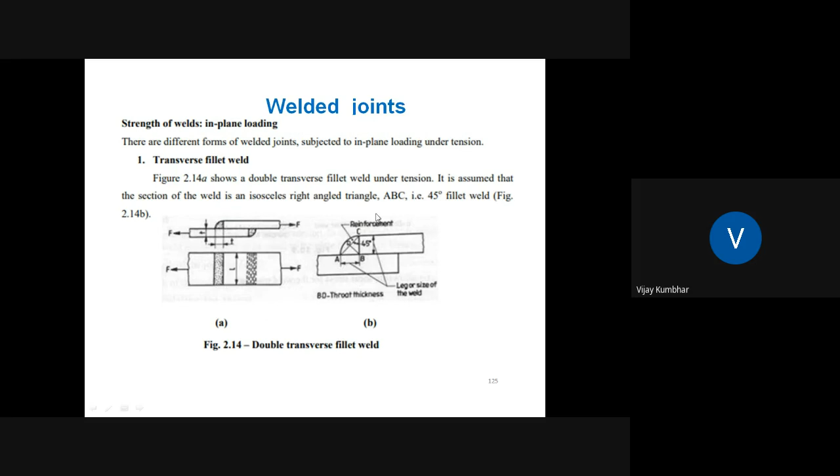Throat thickness can be calculated as T sin 45 degrees, since the angle is provided as 45 degrees. So BD, that is H, is equal to T sin 45 degree, which can be written as T divided by root 2. The resisting throat area can be calculated as HL, which equals TL divided by root 2.

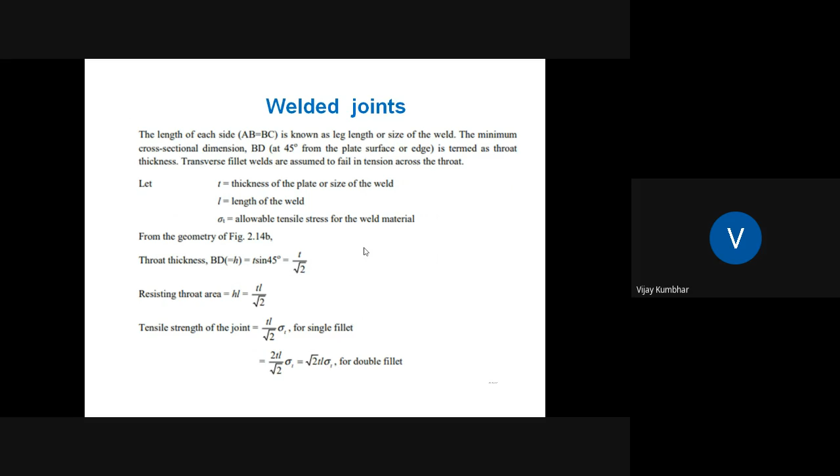The tensile strength of the joint is TL divided by square root 2 into sigma T for a single fillet, and 2TL divided by square root of 2 into sigma T for a double fillet.

For the parallel fillet weld, the same equations apply. The resisting throat area is TL divided by square root of 2, and the shear strength of the joint is TL divided by root 2 into tau for a single fillet, and 2TL divided by root 2 into tau for a double fillet.

These are very simple equations, you might already be aware of them.

Now looking at the butt joint, single V butt and double V butt joint, with H1 as the throat thickness. H1 and H2 represent the throat thickness at the top and throat thickness at the bottom.

Tensile strength of the joint can be calculated as TL into sigma T. For the double V joint, tensile strength of the joint is H1 plus H2, into L into sigma T.

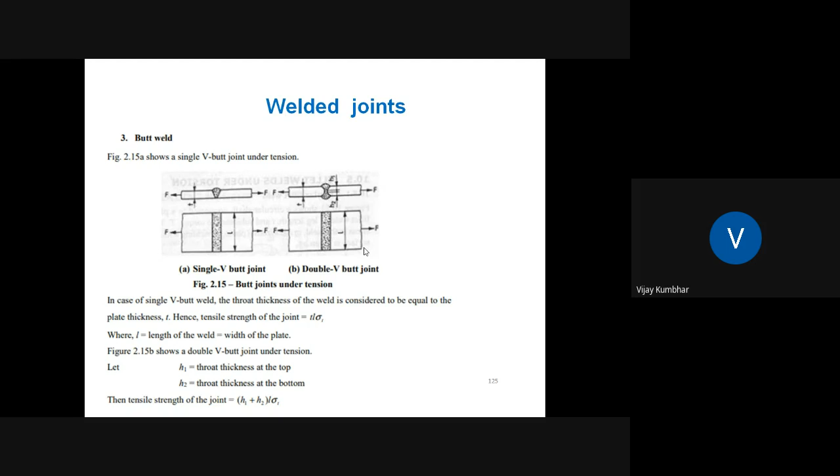In case of fillet welds under torsion condition, tau is equal to T into small d divided by 2, divided by J. Capital J is equal to pi into T into D, capital D divided by 2.

Tau equals T into D by 2 divided by pi, T into D bracket D by 2 square, which can be simplified as 2T divided by pi into T into D square. The maximum value of shear stress occurs in the weld throat.

So you can remember these standard equations for fillet welds, parallel welds, single V weld, and double V weld.

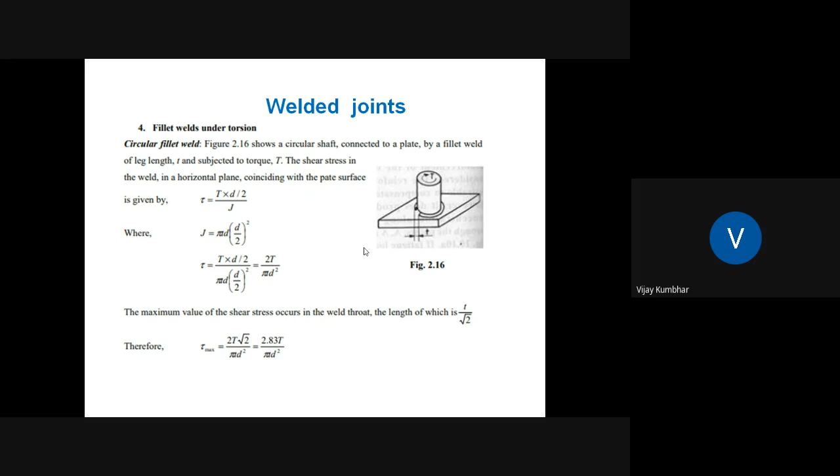These are set screws, semi-permanent fasteners which hold collars, pulleys, or gears on the shaft. You can see the different types of bolts.

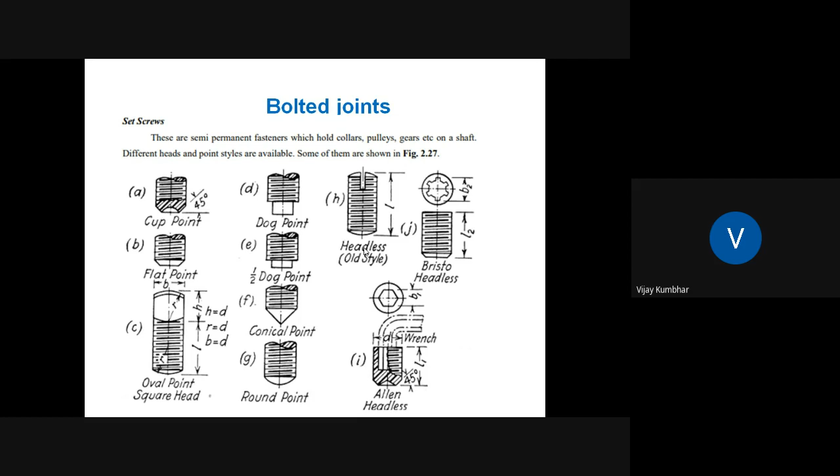Cup point, dog point, headless, half dog point, conical point, round point, oval point, square head, flat point, Bristo headless, Allen headless, etc. Then these are the V threads.

V threads are generally used for securing because they do not shake loose due to the wedging action provided by the thread. In case of these threads, square threads give a higher pitch and low friction.

Then if you see the design of this bolted joint, there are various stresses in this screw fastening, so we have to calculate various sorts of stress estimation for this particular bolted connection.

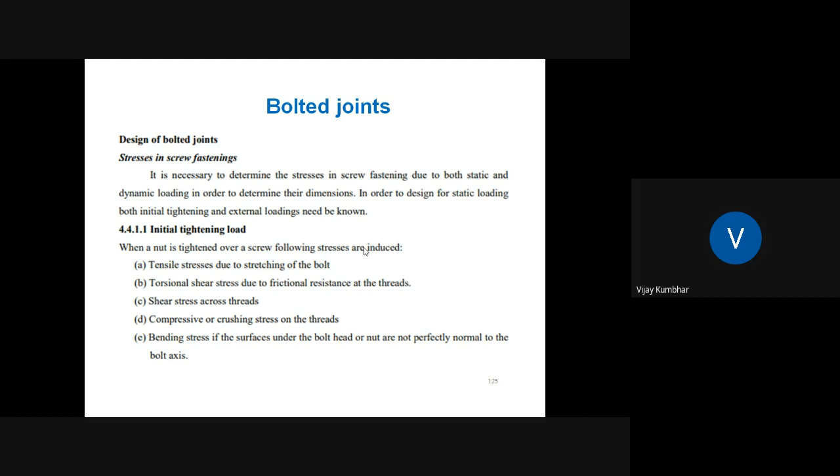So you see the initial tensile load, tensile stresses acting due to stretching of the bolt, then torsional shear stress due to frictional resistance at the thread, shear stress across the threads, compressive or crushing stress on the threads, and bending stress if the surface under the bolt head or nut is not perfectly normal to the bolt axis.

Then there are certain types of loads developed in this bolted joint. You can see this is the tensile load. The initial tension in the bolt will be estimated by the empirical relation P1 equals 284 d kilonewton, where nominal bolt diameter D is given in mm.

This relation is used for making the joint leak proof. If leak proofing is not required, half of the above estimated load will be used. However, since the initial stress is inversely proportional to the square of the diameter, sigma equals 284 D divided by pi by 4 D square.

Bolts of smaller diameter such as M16 or M8 may fail during the initial tightening. In such cases, torque wrenches must be used to apply the known load.

The torque wrench relation is given by T equals C P1 into D, where C is a constant depending upon the coefficient of friction of the mating surfaces, P1 is the tightening load, and D is the bolt diameter. The second condition is the torsional shear stress.

You might be aware of this equation, tau equals 16T divided by pi Dc cube, where Dc is the core diameter. By considering this collar friction, whatever torque is developed, you can calculate it for this particular threaded condition.

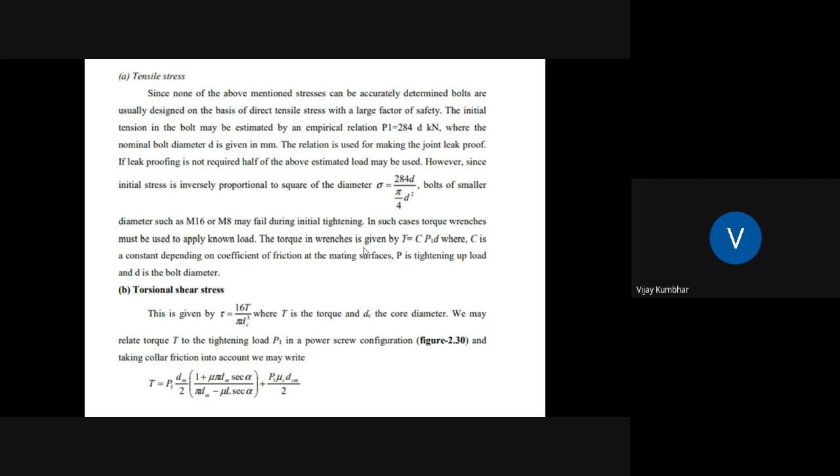T equals P1 dm divided by 2, in bracket 1 plus mu pi dm sec alpha divided by pi dm minus mu l sec alpha, bracket complete, plus P1 mu c dcm divided by 2, where dm and dcm are the mean thread diameter and mean collar diameter respectively, for the thread and collar respectively. Alpha is the semi-thread angle.

You might solve such types of examples in case of these types of bolted connections and types of threads. Then, shear stress across the threads.

This can be calculated as tau equals 3P divided by pi dc into d into n, where dc is the core diameter, d is the width, and n is the number of threads sharing the load. And crushing stress on the threads can be calculated as sigma c equals P divided by pi by 4 into d square minus dc square into n, where n is the number of threads.